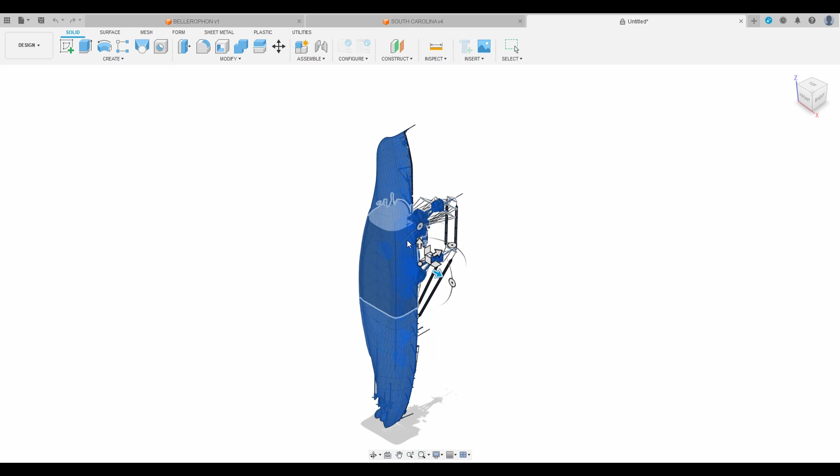There we go, and we'll set it to the correct orientation. Select OK. From here, what I'll usually do is I will scale it by going to Inspect.

I'll select a point, the furthest point on the bow to the furthest point on the stern, roughly. You'll get your measurement, you'll do your math, figure out exactly what scaling ratio you would need to get to the correct length.

Once you figure that out, I'm not going to do it here, but once you figure that out, come here to Modify, Scale, select everything, type in whatever that amount is, say it's 4.358, we'll just go with that.

That'll scale it to the correct size, and then I will double check to make sure that it is correct before I continue on. So I'll select the furthest point of the stern, furthest point on the bow. Now I get like 46.589.

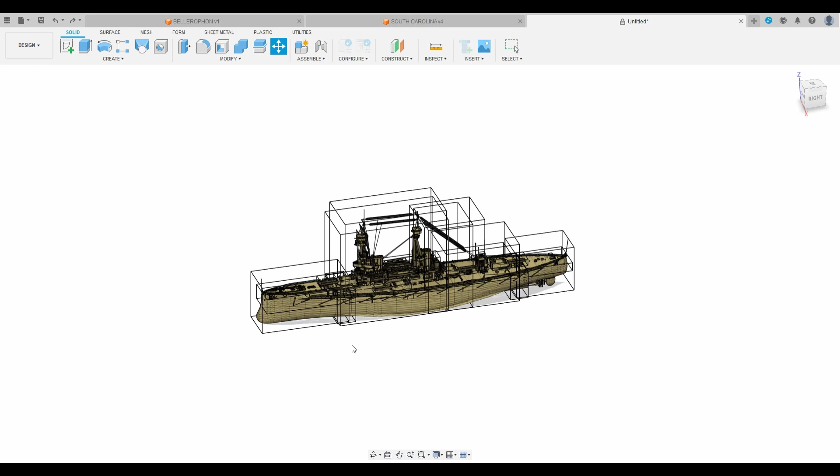So then once it's scaled, we'll want to center it up with the origin point. That way we can easily sketch all of our rib stations and everything on the center line.

Just as an aside, your drop downs are not showing. My drop downs aren't showing up here. Yeah, when you hit the modify, we don't see anything. Okay.

That's strange. Anyway, if you go to modify in the drop down, you'll see scale and everything else.

So for the movement, grab your move copy, select everything, and then let's move this out of the way so we can. Where is the origin at? Make the origin visible, that'll help.

I like to put the origin point on the very tip of the bow, not the furthest point, the actual tip. Then you'll basically just walk it in, play with your measurements until you get it all the way there.

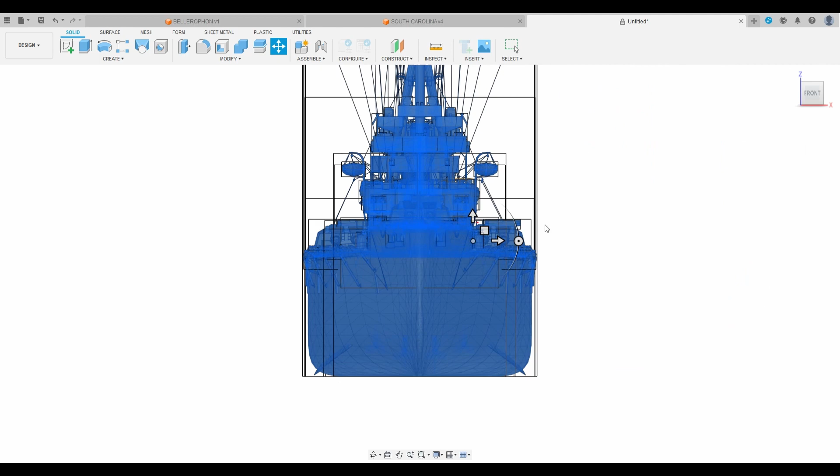So you got the tip on the point there, and then you come over to the front. Same thing over here, it's a little harder to see because it's blue. But...

Once you get that all centered and everything, what you'll get is this. So I got it perfectly on the point, the bow there, center line of the ship, and now we are ready to actually begin the designing process.

Another thing I didn't mention, there's a lot of extra details and unneeded superstructure and whatnot that even if you're designing like superstructure for 3D printing, you don't need. So you can come through and clean out a lot of this.

What I'll often do is I'll just select, hit Control, or Shift, sorry, that'll select everything between those two selected bodies. And I'll just inspect, make sure it's nothing that I need, then hit delete and get rid of it all.

Once you've done all of that, what I'll also do is I'll select all the leftover bodies, because this is a massive list and it's hard to keep everything organized if this is constantly in your drop down. So I'll select all the bodies, and I'll move them to a group, which I failed to create a group before we did this, so let me start over.

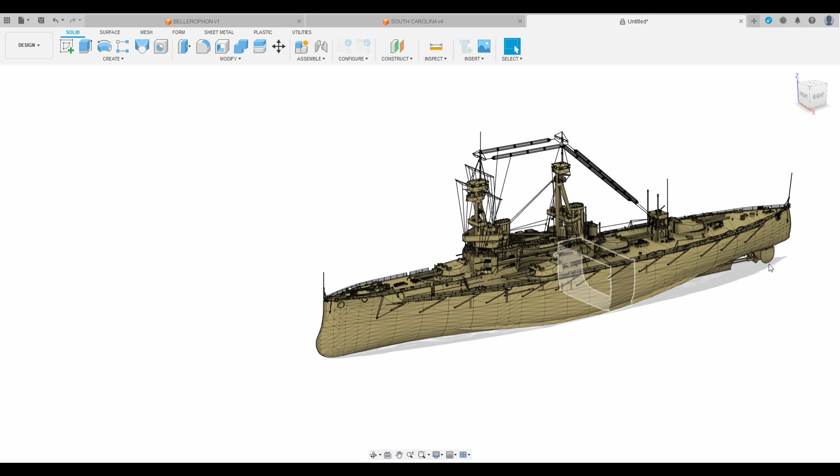And then that will move all of our mesh bodies into this group that we can easily toggle on and off for visibility. And then when we open up our bodies tab, we don't have a million bodies to scroll through to find what we're looking for. That just helps keep things organized. So we'll move over here to our properly scaled, centered one.

Now to begin this, the STL game model, I'm not really going to use any of that to convert it into an object or a solid body. I'm just using it as a 3D set of plans essentially.

So what I'm going to do is set a series of planes along the length of the hull where I want to create rib stations like you'd see in a set of plans. I'll come over here to offset plane, select that, come off of our plane here. I'm going to come out, usually on the bow, I'll start out at about 2 inches.

Let's move this back a little bit. I want to start right about where this line is. That way I can create this bow in one piece. So we'll put our first rib station here.

And then we'll just continue on adding these down the length of the hull. You'll want to have rib stations around features of the hull that you need to capture. So like this deck step here, I'm going to put a rib right where it starts. We'll place a plane there.

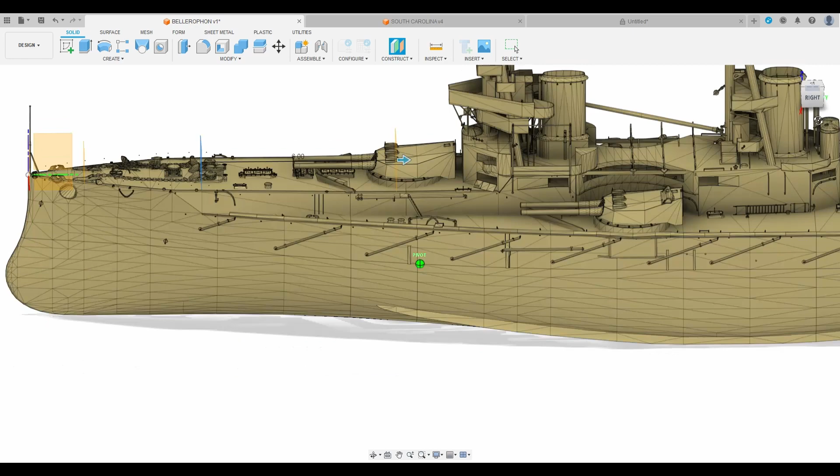From there, we'll just continue on. You don't need them super close together. I space them out anywhere from 6 to 8 inches, depending on what the shape of the hull is where I'm placing these. So I'm just trying to capture the general shape of the hull.

I'm going to place another one here at about 6.5 inches. Offset another plane. Try and make sure you get one around the widest point of the hull. So let's go about 8 inches here. Place another one.

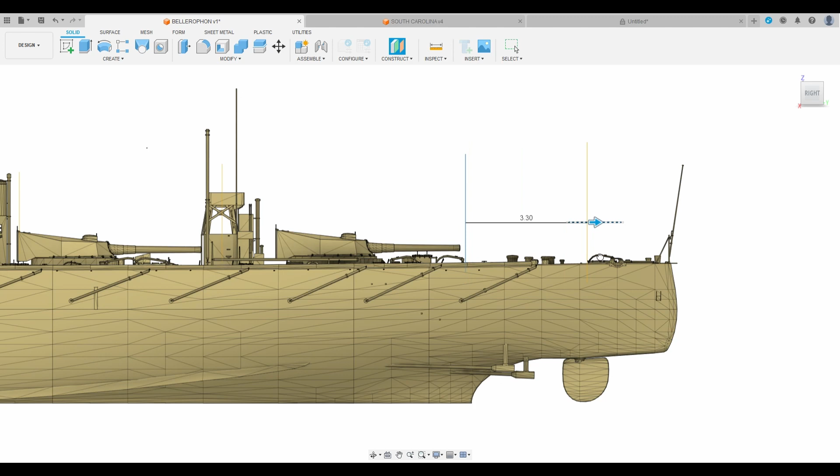And continue on. We'll go with 5.5 here. Go 5.5 again. Drag another one out. I like to place one right where the end of the keel stops and proceeds into the stern. Somewhere around that point I like to drop one, because that's where it will stop lofting and create another loft for the stern. Place one there, and then we'll put one more to give our stern some shape.

That looks good. Alright, so now if I turn off the mesh bodies, you can see we have a series of planes, and then we're going to create basically rib stations off of this body at every one of these planes.

So we're going to come over here to the mesh design area, and right here we have 'create mesh section sketch' in the create tab. You'll select that. It's going to ask you for a body that you want to create a mesh section from. So we'll click on this nose piece, then section plane, select that, and click on the plane that we placed. So this first one here, you'll see it's created basically an outline of the outside of this body. So we'll hit OK.

That's one done. We'll continue on down through, select the body, get our second station here, hit OK, all the way down through.

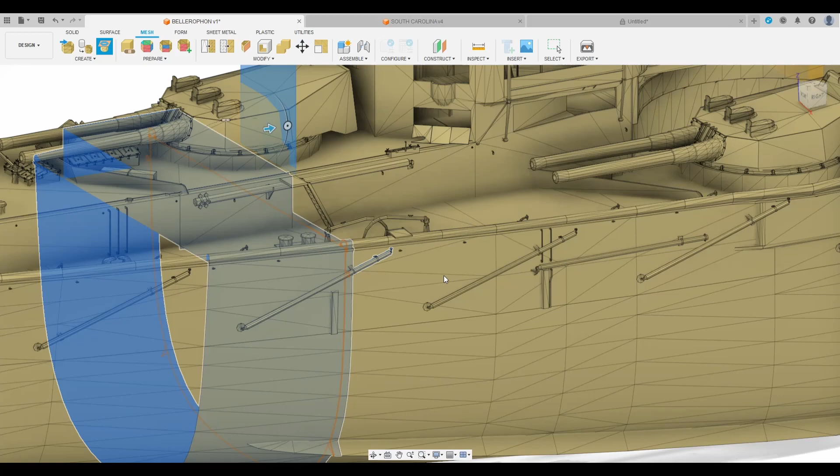And then you can see, if I turn off the body, we've created rib stations in place of the hull. So just continue on down through until we get all of these done.

Now we'll do the side profile of the boat. So since this is broken up into multiple bodies, it's kind of a pain, but just select your first body, select your center line plane, OK, and then continue on down through your bodies. This will give you your side profile.

And this making sense so far? I don't know if I have anybody watching at this point.

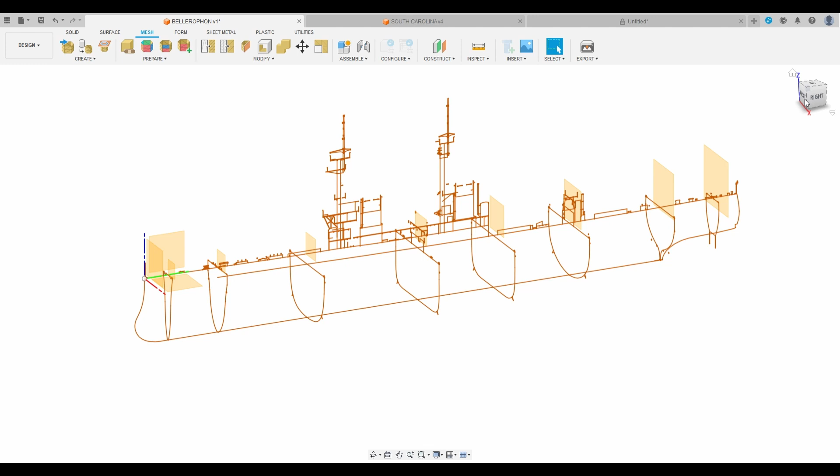Now from here we can start sketching. So before I start sketching out the rib profiles, I like to do the side profile first. And since I'm designing this for 3D printing, I like to make the nose and stern of the boat flat and thick instead of coming to a point like the actual ship.

To accomplish that, I'm going to offset the side profile sketch 0.1 inches from center line, and that'll give me a 0.2 inch flat section between the left and right halves. That'll give me a nice thick nose and stern that's not going to break when it's printed. So to accomplish that, I'm going to come over here to my centerline plane, select that, offset it by 0.1 inches, and that's now going to be my centerline sketch plane.

If that doesn't make sense, it'll make sense once we start lofting everything. So we're going to go to Create Sketch, and make sure we select that plane that we offset.

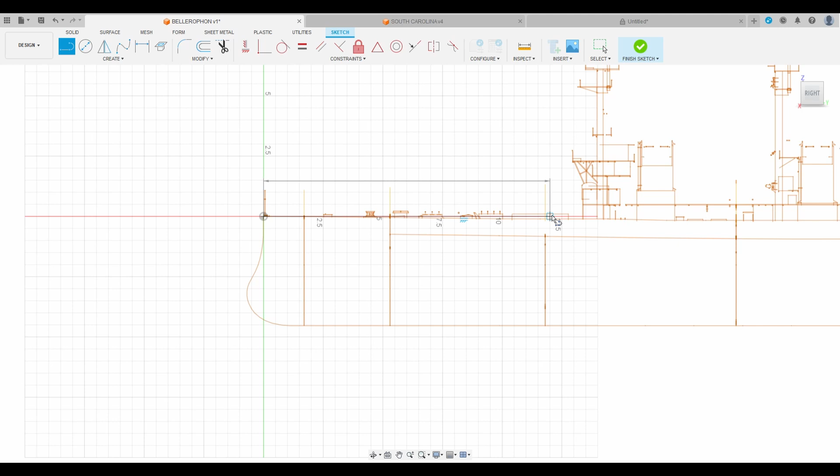We're going to start by defining the bow. This has a bit of a downward slope to it, but we're just going to make it flat. The actual flat part of the bow only comes out to about here, so we're going to drag this a little bit beyond.

And then we're going to define the bottom of the boat. Let's start scrolling here. There we go. Bring this all the way down, that's going to be the keel. We don't have to get exactly where it's going to wind up, we'll change those later.

I'm going to draw the bow. Just going to select fit point spline, so we're going to create a spline, and we're just going to follow the profile of the bow, putting several points to help define this, and then connect it there.

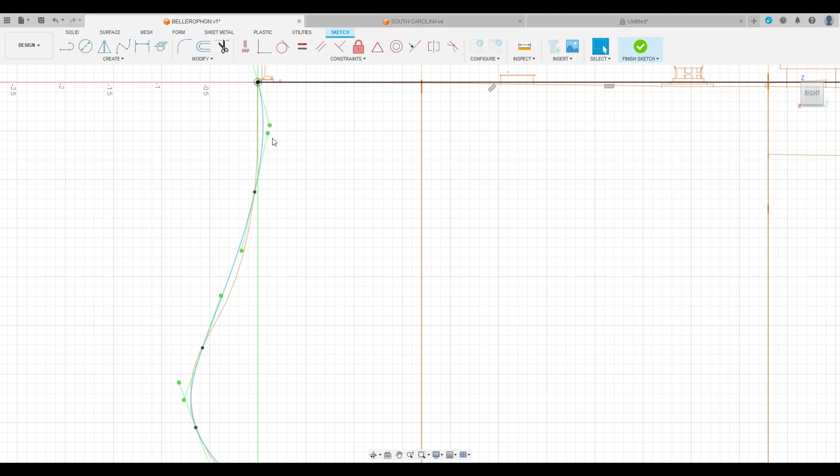Hit OK, escape to get out of the spline tool, and then we have these green arms here which allow us to modify the radius and direction of each one of these points, and we can use that to fit this line to the actual profile of the bow.

So you see this one is angled and it's kicking the line back this way, so we're going to grab this point and change that closer to up and down. This one needs to come in a little bit to get our line closer to the profile. I'm going to drag this one down a little bit, change the angle on it, change the angle on this one some.

This one we want to be in line with our keel profile, that'll make sure it's tangent. Trying to lessen the radius on this, get it closer to the actual shape. That looks pretty good, we'll go with that.

So we got that done, we're going to come over here and define our lower deck. I'm going to come off the stern. We're going to make this completely flat. You can see there's a bit of a bow to it, but we're not going to match that because it's just not productive for our purposes.

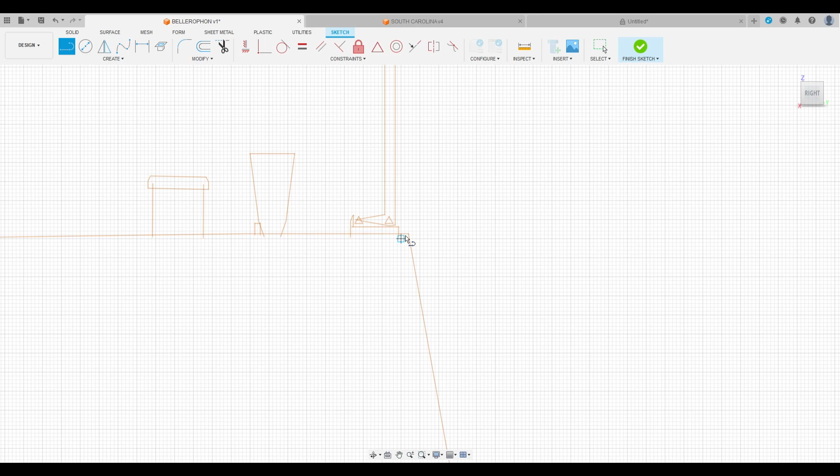So I'm going to scroll in till we get to roughly a similar point to our profile, come across, and that looks good. That will be our lower deck.

Escape. We're going to do another spline for the stern. Let's try that, see if that works. That looks pretty good. The stern, I'm going to leave this connecting piece till later, because I find whatever I put in there ends up being changed. So I'm just going to leave that open, but we have what we need to continue.

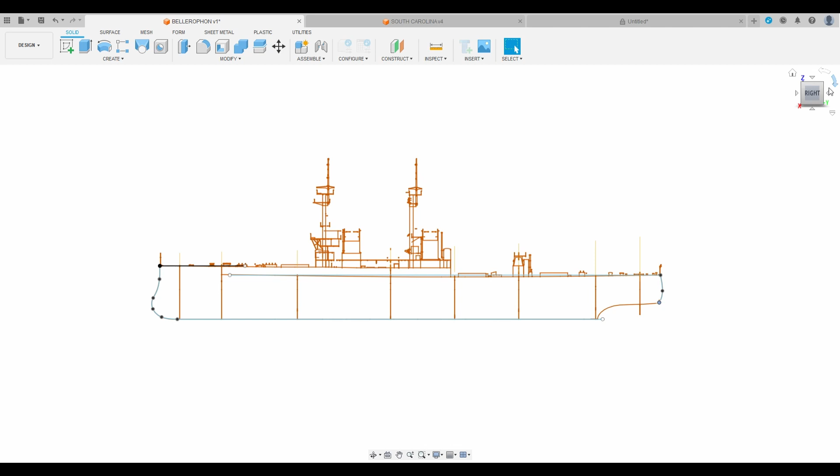So I'm going to hit Finish Sketch up here in the top corner. That's now our side profile. So now we're going to start drawing our rib stations.

I'm going to create a sketch. Oops, I must have been selecting a plane. I'm going to create a sketch. We're going to select our first rib station. And we have all these planes that we created, you can turn those off by clicking visibility on your construction, that'll get those out of your way.

But we also have a lot of these rib stations, it kind of makes it hard to see what we're looking at here. So if you open up your sketches, we can limit the visibility on all of these. I'm going to turn off everything from sketch 1 down, and the rest of these are the side profile, I'll leave those on.

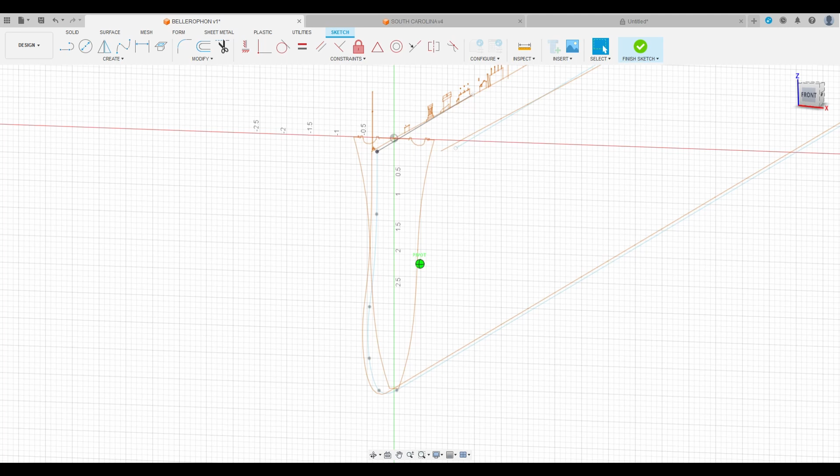So we now have created the sketch, we're looking at it straight on. Before we start drawing anything, we're going to want to intersect this sketch with our top and bottom rib, or top and bottom side profile sketch. So we're going to come up here to create.

I have mine, we want the intersect tool. I think if you go to create, open the drop down to project/include, you'll see intersect. If you click on the three dot drop down, you can pin it to your toolbar, it'll just be up here for simple and quick application. So you want the intersect tool, and you're just going to click on your top profile and your bottom profile, and this is going to create a purple dot where this sketch plane intersects this other sketch.

So our first rib sketch is intersecting the side profile sketch. This makes everything contingent and in line.

Alright, so we're going to go back to looking at it from the front. We're going to create a line, and we're going to come out about 5 inches or so. And these are just guidelines, they don't really serve an actual drawing purpose.

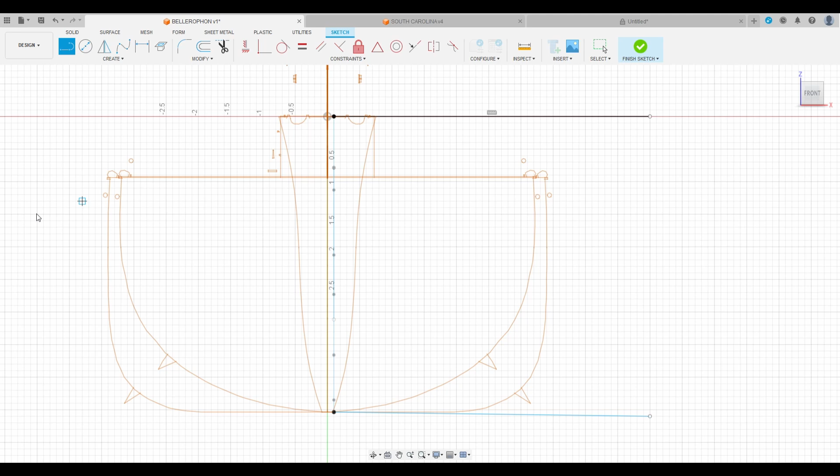I'm quick turning on our side profiles to make sure there's no features in the hull that I need to define, like armor belts or anything like that. Because if there were, I would put a line where they are to help me make sure that I define those points. I don't see any.

So what I like to do is I like to put a line roughly around the turn of the bilge, about there. And then one more kind of in the middle. We'll do this.

And then this line for the lower deck, I want to also have a line concurrent with that. That'll help me tie everything together later on. So to do that, I want to make sure that I have a line in line with our stern lower deck. To find out where that's going to be, I'm going to hit P for project, and it's going to project this line onto our sketch. It's going to create a little purple dot right there.

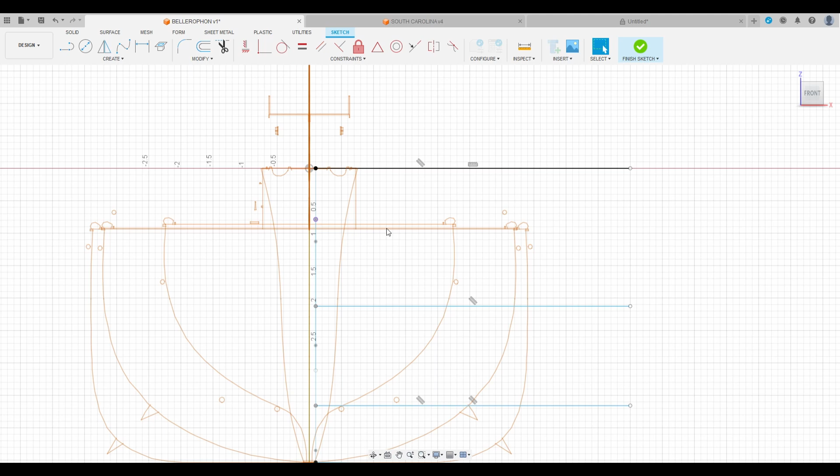That lets me know that's where my stern lower deck is. So I'm going to create a line, bring that out, and there we go.

So these are our guidelines. These will be on every sketch that we do from now on. So now that we have these, we're going to go to spline, grab another spline, and we're going to sketch out this rib. We're going to start there.

On this next line, we're going to create a point where they intersect, where the sketch profile and that line intersect. Go down through and just keep adding those on. And then I'm just going to end it right here at the corner.

I'm not going to try and match where it actually goes to, because our keel area is going to be at least 0.1 inches from center line, so I'm not going to try and make this perfectly accurate.

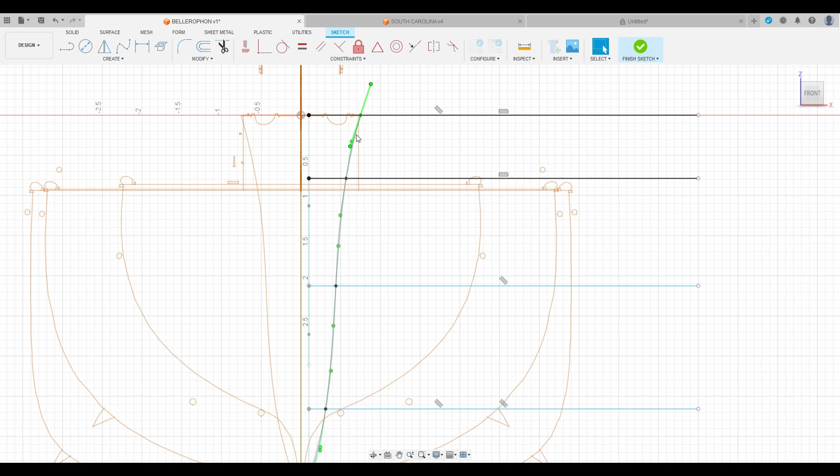So now we want to make sure that our line matches the sketch profile. We might have to adjust the green lines to change the direction of our spline in a couple spots.

This isn't too bad. This one could probably be... which one is it? This one. This middle one I want to tweak out just a little bit. There we go. Alright, I think that's good.

That's our first sketch profile. I finish sketch. Now you can see that it perfectly intersects our keel and intersects with our deck lines.

So with that being done, we're going to turn off our first sketch profile, turn on the next one, and these ones I turned on earlier. We'll turn on our planes again. We're going to now sketch out this plane. Must have been selecting a plane earlier. Okay, select that plane. We'll turn off all the other ones, get them out of our way.

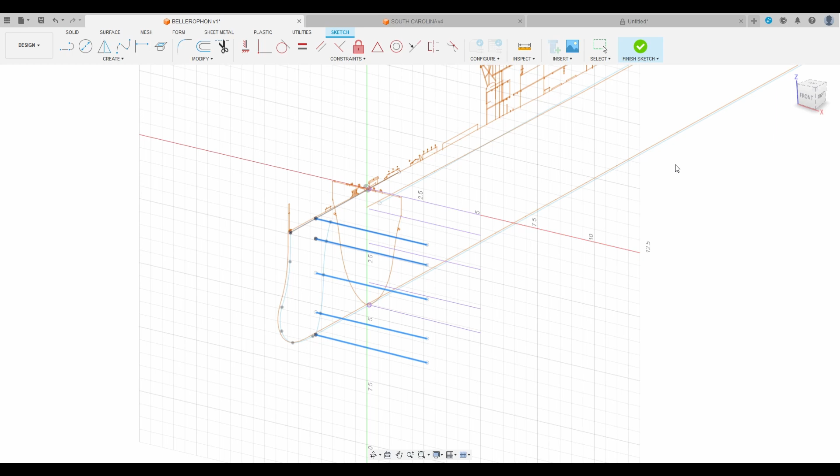Go to our side profile. Now you can see this is where that deck cutout starts on the actual boat. If I turn this back on, you can see where our step deck starts. I chose a point at the very bottom of this, so I get as much of the hull profile as I could.

What I'm going to do is I'm going to model this as if the deck step wasn't there, and then I'm going to cut it out later. So I'm going to go to spline point again. I'm going to just choose a random point up here. I'll change it later. But on this line, I'm going to keep going in line with our sketch profile.

Till we get to the bottom. Also select the corner. Hit escape to get out of our tool there. And then we're just going to make sure that we match our profile.

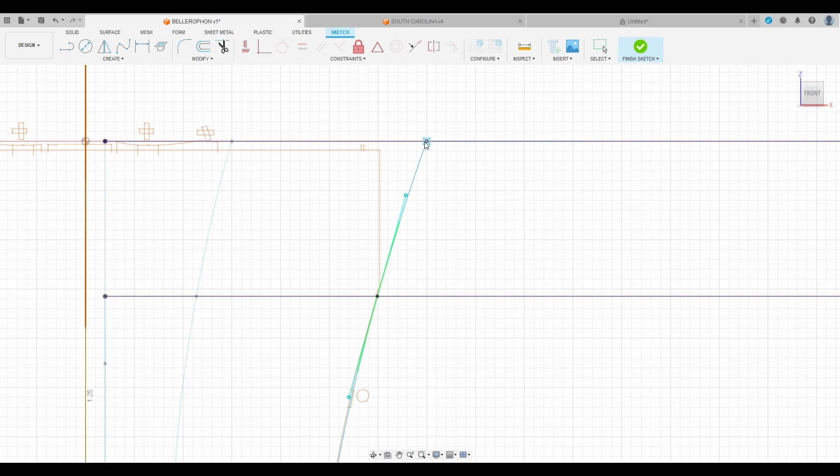And then for this point, I just adjust it to approximate exactly close to what the hull would be if that cutout wasn't there. It doesn't have to be perfect. That looks pretty good. I'm going to finish our sketch.

And now we're just going to continue down the hull with all these sketches. Why does that keep happening? Create sketch, next plane, turn off all these other planes. I'm going to project our lines, hit P for project.

Grab all those lines. We don't need this top one anymore since we're beyond the upper deck, so we'll just need these four. Go to our side profile, select spline, and follow the sketch profile to the same point.

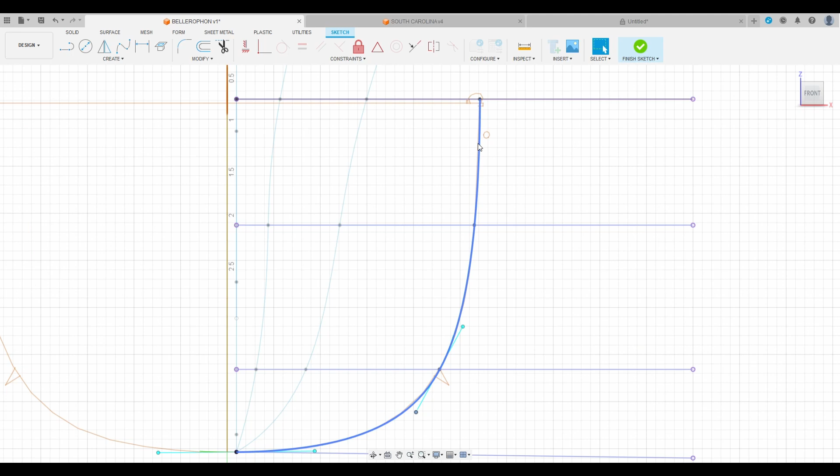Escape to get out of spline. We'll adjust this spline to fit a little better. That looks pretty good. Finish sketch.

Moving on. Turn off that sketch, go to the next one, turn on our plane. Select sketch, plane, turn off all the other planes. Project these lines.

There gets to be a lot of repetition in this process. Go back to front, spline, approximate. When we get to the point in the hull where it starts to get flat on the bottom, I'll just pick a point where it's close to flat, and place a point there instead of trying to come back to center line. This keeps the bottom flatter and more accurate.

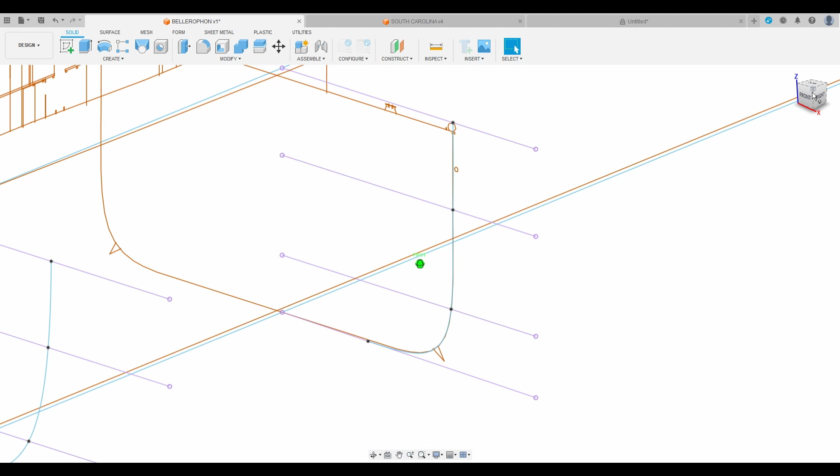Continuing on, go to the next plane. Project these lines. Go back to front profile and continue on following our sketch profiles.

I don't know if anybody's got their mics on, but is this making sense?

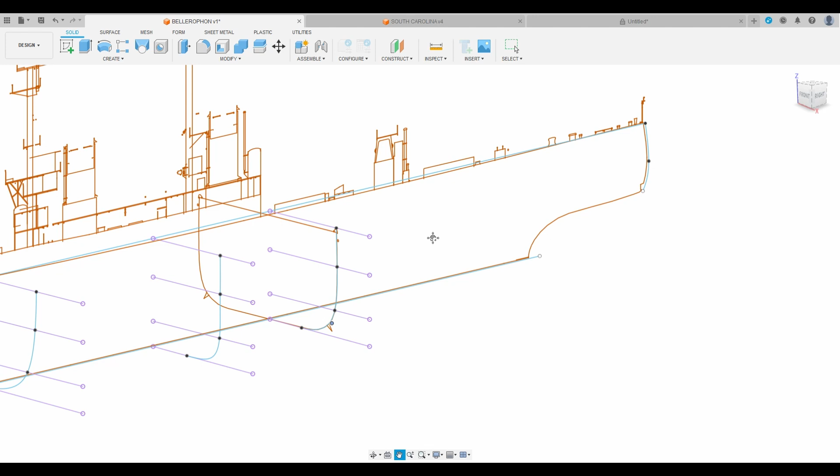I'll turn this plane on. There we go.

Once we get all of these profiles done, that's when the magic starts happening, so just bear with me here for a bit. I chose this boat because it's a pretty simple hull shape and it shouldn't take too long to get done, but it's still going to take a little bit of time here.

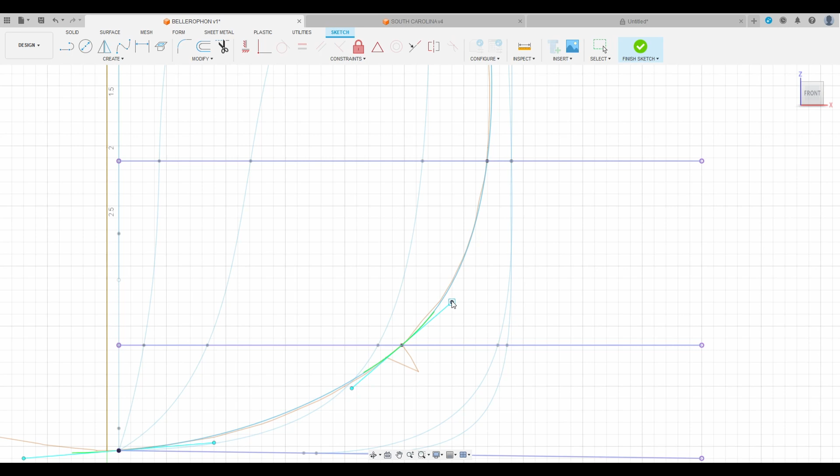There we go. Looks like we got one or two more to go. A lot of what I'm doing will make more sense once we start getting into creating rails and actually lofting the boat. So if it doesn't make sense, hopefully it makes sense here in a bit.

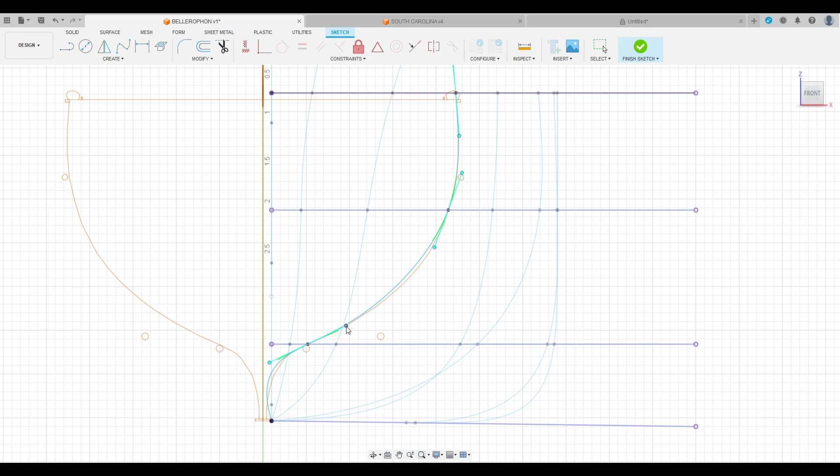Alright, that looks a little wonky. Try and get this closer to what it's supposed to be. These stern profiles are often a little harder to get in line.

Okay, I think that looks pretty good. We'll finish that. One more.

I don't know why that keeps happening. Alright, project that one, that one. I don't think I'll need it, but I'll project that one too.

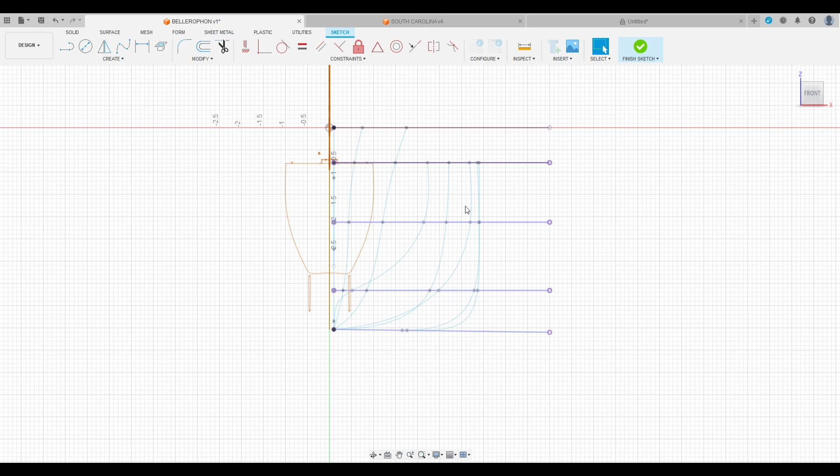The stern profile's often tricky. The bottom finish point, a lot of times I'll change depending on how the lofting's going, so it's kind of one of those - I'm just going to approximate it for right now. I'm not going to try and match this cut in the stern; we'll add that later. So I'm just going to come down, follow the profile, and come to the center line.

A lot of times what I'll do is draw a line from here to here, move this point to that line, and then loft it and cut out the actual profile of the stern. But we'll get to that here in a second.

So what I'm going to do is click on this side profile again, right click, edit sketch, and that'll open it back up. I want to end this keel profile at this rib, so I need to project this rib onto the sketch, which will let me select it and draw a line off of it.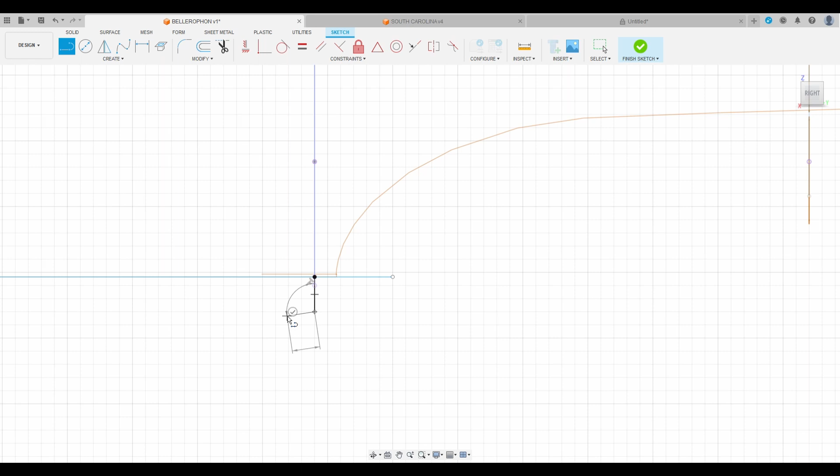The purpose of that is just to trim this tail section off. If I didn't project it and draw a line, it would delete the whole thing because it doesn't know that rib exists. So I need to create a point that it will trim to, then get rid of that. So I'm going to draw that now, and that's how we're going to loft the stern.

I could try doing it semi-shaped. We'll give that a shot. Sometimes it works, sometimes it doesn't. We're going to try and match that profile.

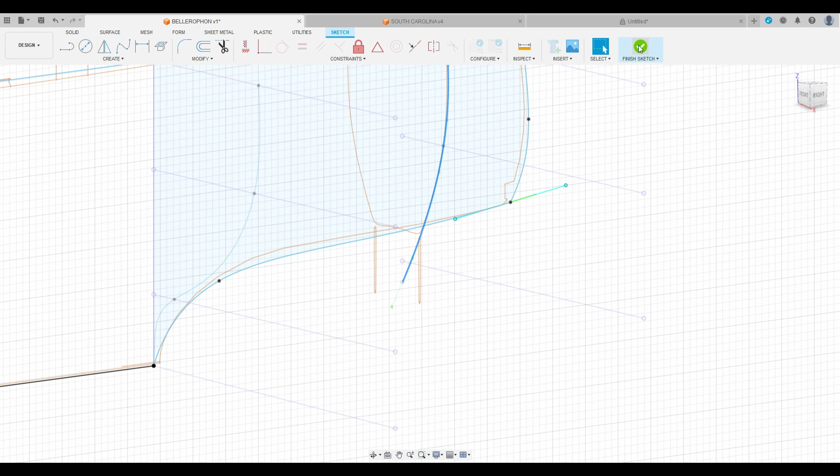So that means I need to change that. Alright, we'll finish our side profile sketch. We will open or edit the sketch again. We'll want to intersect this new line, this new keel that we drew, so we know where our rib profile has to end.

I'm just going to redraw this. I'm going to delete it and redraw it, see if we can't make this right. This may work, this may not. We'll find out. Change that to flat. I'm going to decrease the radius on this by a lot.

That way we get the actual shape that we need. And then change these to be closer. Close enough, I guess. We'll try it. It may work, it may not.

Alright, so the stern's now done. We'll come over to the bow and do basically the same thing. We're going to click on sketch, right click, edit sketch, come to our side profile. I'm going to trim this down. See, if I was to try and trim this without drawing that line, it'll just cut the whole thing away, and I don't want that.

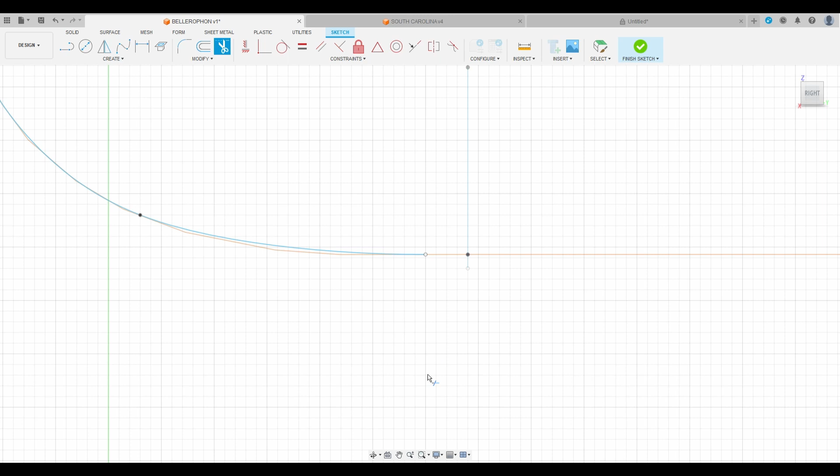So I'm going to project this rib onto the sketch, the line, drop it down, trim away that excess, and then the bow profile I'm just going to drag to the end of that line. Now we're just a little bit off, but I'm not going to really worry about it. It's close enough.

So now we have our bow profile that ends at our first rib. We have our stern profile that ends at our last full rib. And then that's pretty much all that we need for that. Oh shoot, I forgot, these points that we created in every rib, we're going to also connect those to the bow.

So we're going to go back, edit our side profile. All these lines, all these points that we, I guess they didn't project. All these points, we're going to project them onto the sketch now.

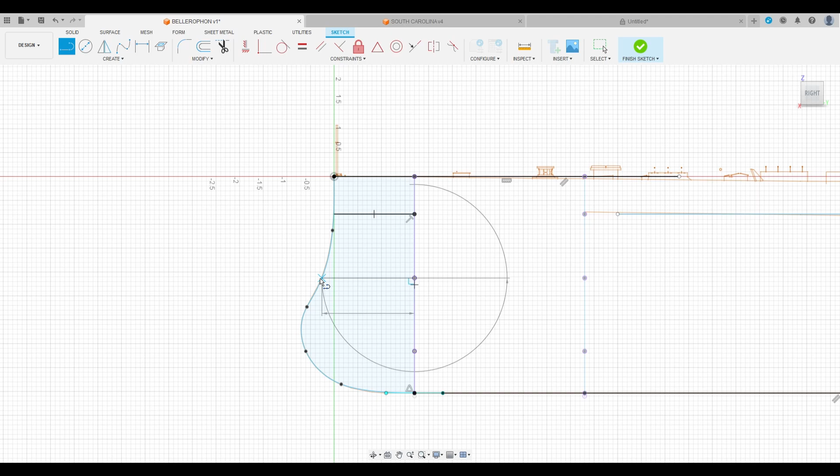And now we're just going to draw a line from those points at a right angle to the bow, wherever it intersects. That doesn't seem right. Alright, well, close enough. And then we're going to do the same in the stern. Let's see, just going to do this one. Close enough, I guess. Alright.

Finish sketch. Now we're going to create our rails. These will help define the shape of the hull and keep everything in line as we loft it. It'll also give us our correct bow and top profiles.

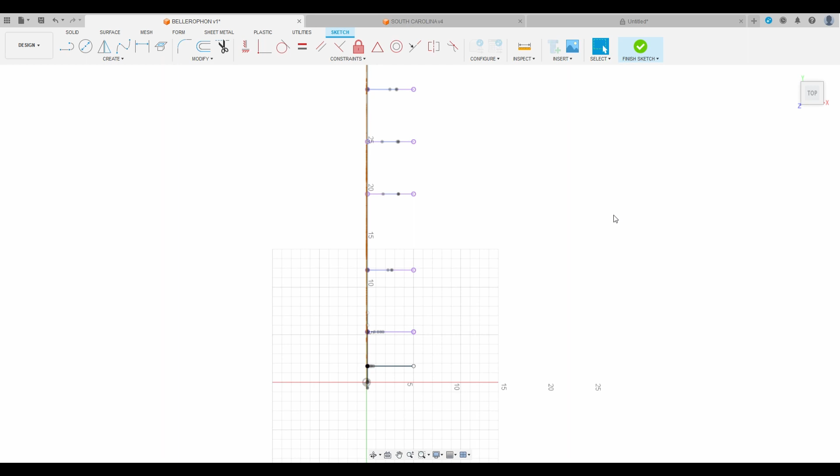Alright, so we're going to create another sketch. We're just going to go to our top plane, looking from above. Over here in your sketch palette, this may be closed, you might have to open it up. There's 3D sketch, we're going to want to turn that on now. That's the secret sauce. So with that turned on, we can now draw sketches in 3D.

So I can go from all different points in this model. It doesn't matter if it's on a plane or what plane it's on, it goes between planes. So we're going to use that to create our rails for lofting.

So we're going to start here at our bow, very tip of our bow in the side profile. We're going to click that point, go to the top of our first rib and our second rib. And then that's all the points in that plane, so we're going to just stop there. Hit escape, that'll get us out of our spline tool.

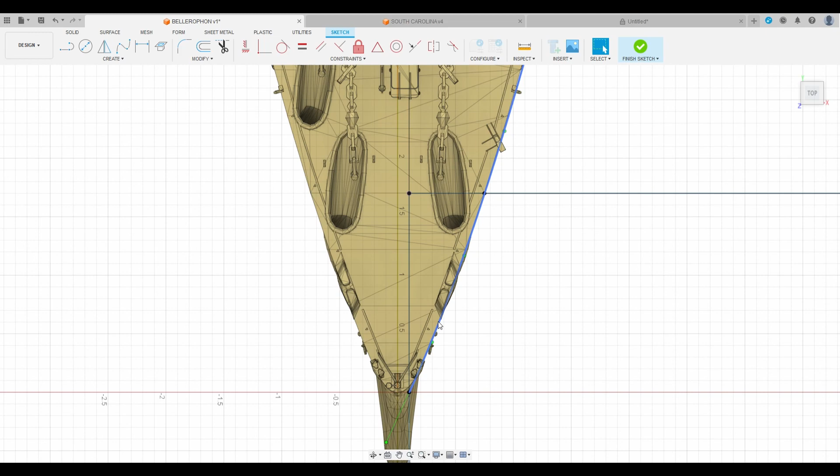Come up to our top profile. We're going to turn on our mesh bodies and make sure that our line matches the curvature of the hull, which it does, so that's good. Got almost a perfect match.

So from there, we're going to do the next one down. Get our spline point, we're going to come to where that line intersected with the bow. Click there, go to our first point, next point, and then it'll be the tops of all of these ribs. We're going to just select those points, going down the length of the hull, all the way to the stern, and then finish.

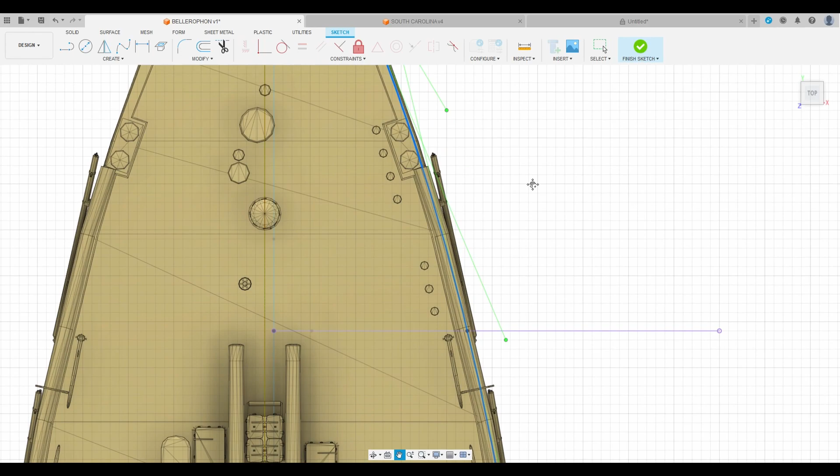So now we have a perfect line defining all of these ribs, and it'll give us a nice, clean, continuous deck profile. I want to make sure it matches the hull. Turn that back on, click on it to make it blue. Matches our stern profile pretty well. I like it, alright, that'll work.

Turn off our mesh bodies. And then we'll continue to do our rails for the rest of these points, down the length of the hull.

And then I'm going to just end it here. I don't like to continue this one into the keel. I've had weird issues with that in the past, so I'll just end it at the very last rib that it comes to.

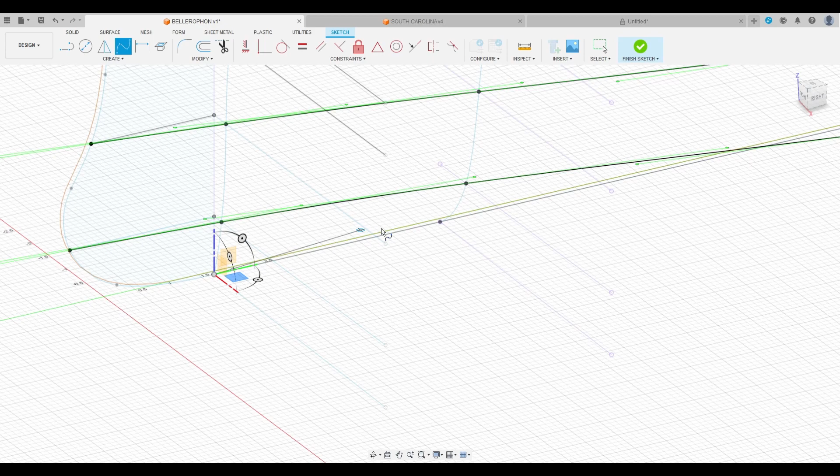And then I like to create one for the bottom of these ribs, so I'll go to the bottom point. The only reason for this is because of... you know what, I could probably get around this. Hang on.

I'm going to open up these sketches and draw a line to the center profile. This will be easier. So if I was to go back, where I put that last spline point to put it on the bottom of the hull, I would draw a line back to the center line. That's what I should have done. I'm going to do that on this one as well.

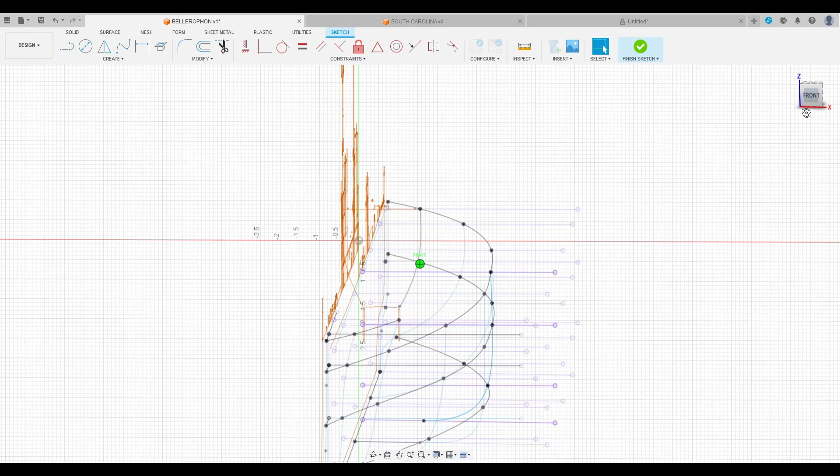This just puts the end of every sketch on the center line. Alright, that should work. We got a lot of these projected lines. If you wanted to delete them out to make it cleaner, you can. I usually don't, because it doesn't matter—they're only there for a brief minute, and then I'm beyond needing sketches.

I'm going to delete them out just to make this a little more clear, so we can see things better. Give me a second. Alright, so they're all out of here.

So at this point, we're ready to loft. So what we're going to start with is the bow. We're going to go over here to our surface tab, select loft, and now select our profiles to loft. We'll start with our first rib profile, and we're going to come over here and select our bow profile.

Oops. Since they're touching, Fusion thinks they're all one. So I'm going to deselect the bow profile, hit the plus sign, and that's just telling it the next one I click on is a separate profile. And now we get a body drawn.

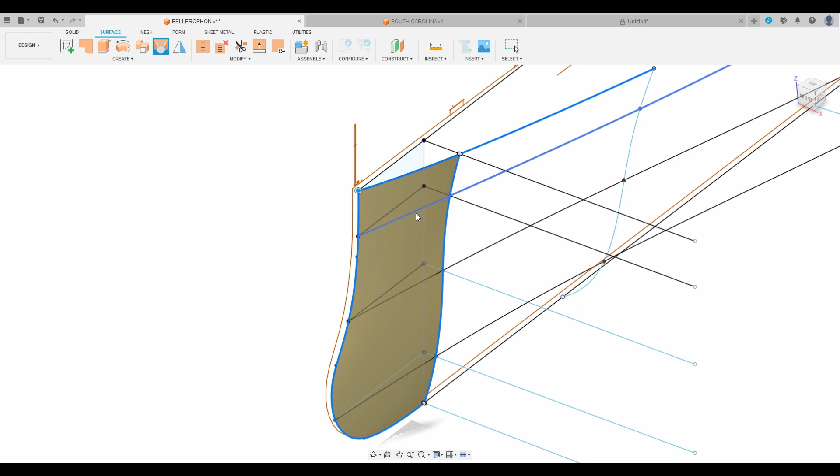Come down here to our rails tool, select the pointer, and then we'll select each one of these rails that we created earlier. Once we have all those, we can go ahead and hit OK. It gives us the first part of our bow.

And now Fusion will close or make invisible any sketch profile that it uses for the first time. So all the sketches, that first one, all of the rails—it just turns the visibility off on those. So I'm going to go back and turn on our side profile, first rib, and then our rails.

So from here, we're going to go to loft again, go from our first rib to our second rib. Going to select our rails again to keep our hull shape continuous, and select our keel to keep that straight. Hit OK.

And we're good there. Now to go from this point where we have our upper deck to our lower deck, if I was just to start our loft, select that profile with this profile, I'm going to get this—it's going to bring it down to our lower point here. Don't want that, I want it to be straight. So I'm going to go ahead and cancel.

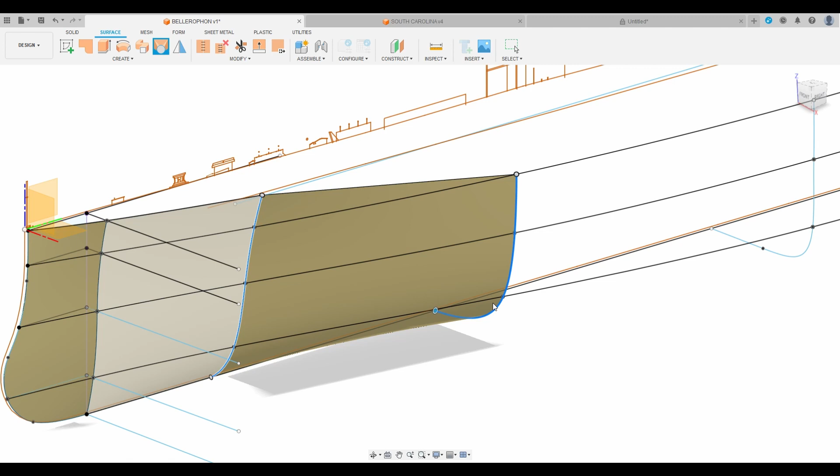I'm going to come into this rib sketch, edit it. Oh, I got to turn it on—turn that sketch back on. Select, right click, edit sketch. And then at this point, we're just going to draw out a line. Doesn't really matter where it goes. We're going to go to modify and break.

With that, it'll create a break in the continuous spline point here at that line, so then we have an upper and lower part of the sketch. Go to our trim tool, delete out that line because we don't need it. Finish sketch. And now when I go to loft again, it doesn't select that part.

So now we go from our lower piece to our next rib profile, and the next, and the next. We're going to do most of the hull right here, select all the way back here to the stern. We're going to select our rails, and this keeps all of our lofts... oh, that's not good.

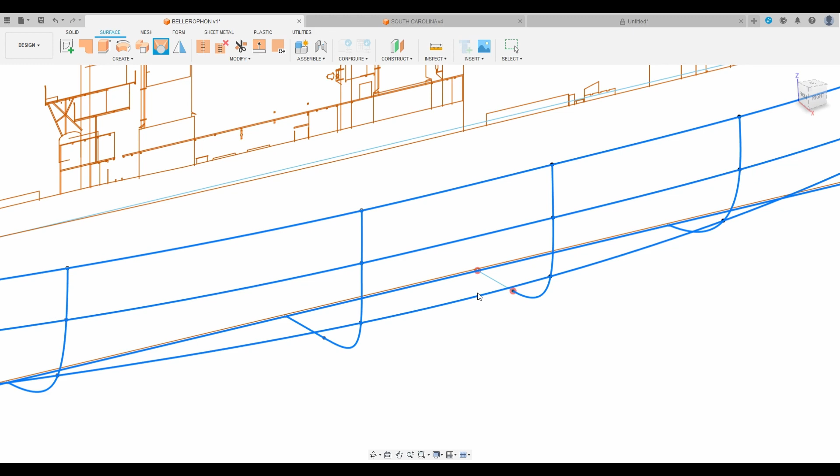Okay, I know what I did wrong. Those extra lines that I drew, I did not select those, so it has the end of the sketch here. It's not connecting to my rail back here. So I need to go to this profile 3. Select that, select there, and now it's connected and it's happy. And this is profile 4. Select that, and there we go. So now our rail is touching all of the points.

Okay, I think that is good. I'm going to go ahead and hit OK. And if you turn off our sketches at this point, you can see the hull start to take shape. It's looking pretty good. I'll turn this back on and finish up here in the stern.

So what we're going to do, we're going to loft from here to here to here. And for our rails, we're going to have our top, middle. I'm going to try and select that. I think that'll work. No.

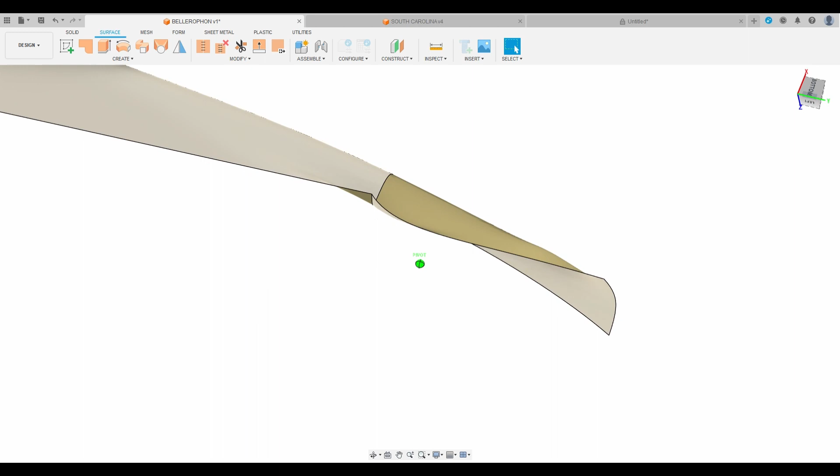That's looking weird. I'm going to go ahead and hit OK, just so we can look at this, but it's looking kind of funky. We'll turn off our sketches, and yeah, that's looking kind of weird. I don't know if you can see it. Let me turn on our zebra analysis here. Let's see where we get like a really weird bulge right here, because I tried to match the stern profile.

So we're going to go back and do what I was going to do originally and just cut that stern profile out after the fact. So what we're going to do is edit our side profile, delete out this spline. We're going to draw a straight line from the edge of here to the tip of our stern. We're going to finish our sketch, and then this profile here, we're going to edit sketch.

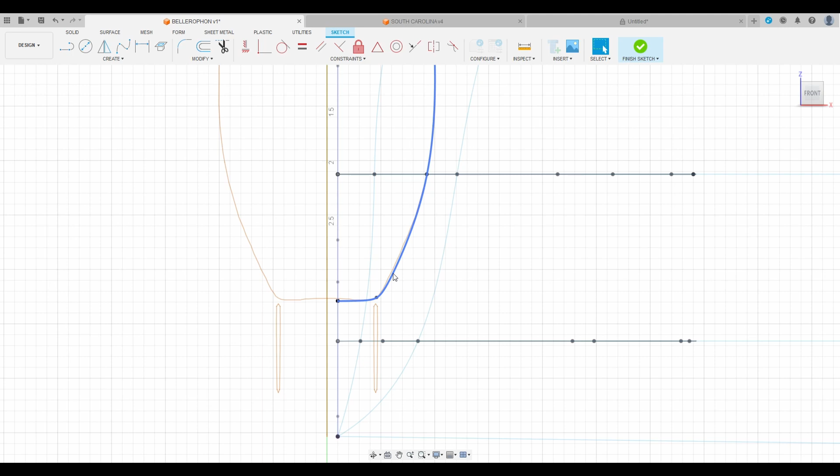We're looking at it from the back. Let's go around to the front. Let's turn off our bodies for a second while we work on this. Delete this previous spline. We're going to intersect this sketch with our new stern profile. Go to intersect. And I'm going to delete this old intersect out of here so I don't get confused.

Go back to front. Deleted those projected lines. I'm going to add those back in real quick. Looking at it from the front. I'm going to turn off 3D sketch for a second because I don't need it.

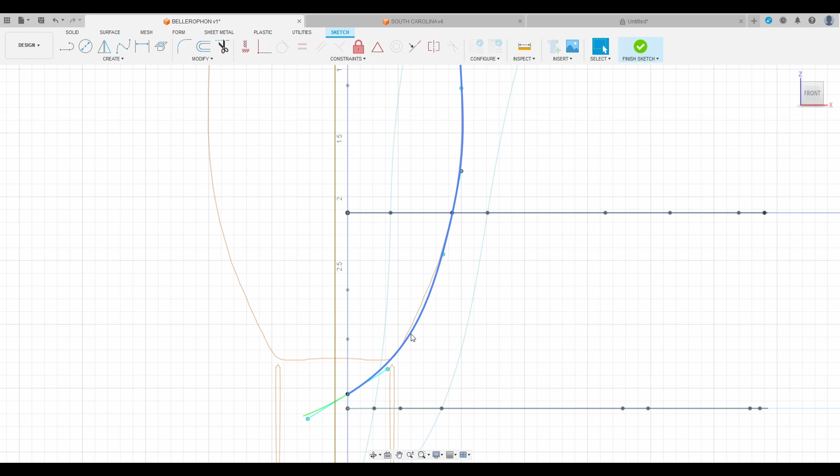And we'll come down to here, and then we'll just adjust this to meet roughly the correct shape of the stern. Not perfect, but it'll be alright. I think this will work. Alright, we'll finish our sketch.

Turn our bodies back on. We're going to loft from here to here. Oh, hang on, let me start this over. I had one of those spline control points selected when I started the loft, and it was trying to go between that and then our profiles. Alright, let's try that. Select our rails.

That's a problem. Okay, so when I deleted that old profile out, I didn't make sure that I intersected our rail, so I have to go back and make sure I do that. So doing it right the first time really helps.

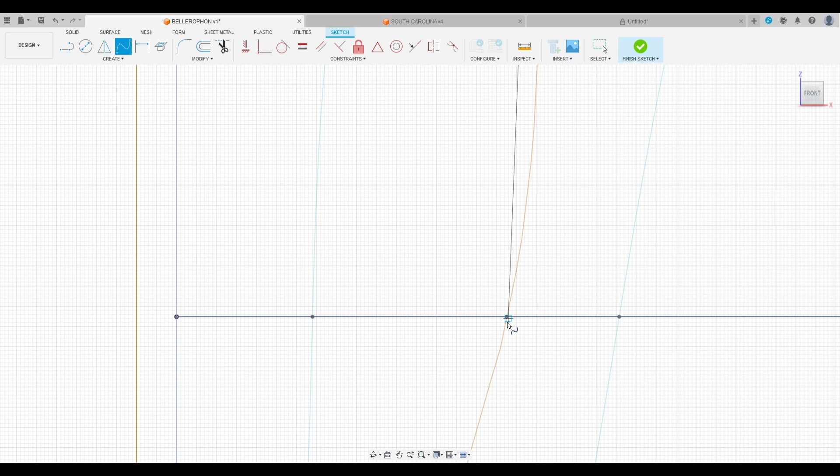Alright, so we're going to delete this spline. We're going to do an intersect with this rail. I have to make sure we start from that point. Alright, continuing on, let's do this again. Let's try to get it right this time.

Okay, that looks good. Alright, this time it's going to work. We've got that spline point selected again. X that out. Select our profiles. There we go. Our rails. I failed to do it on that one, of course. Alright, go back and do that one again.

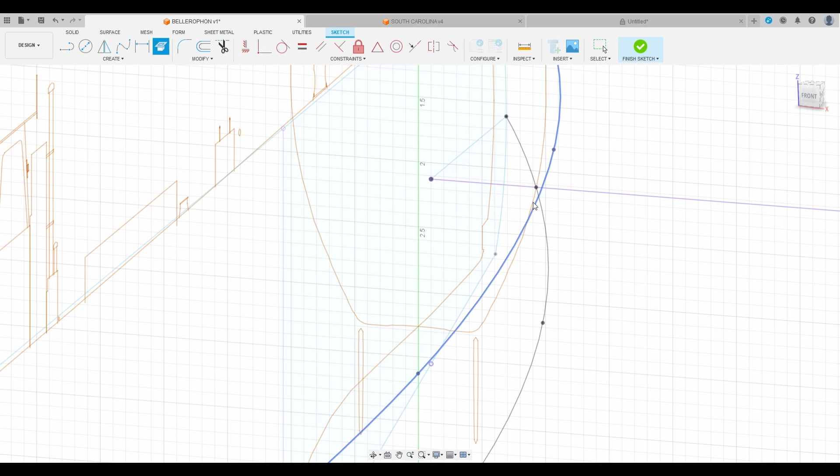Third time is the charm. Alright, delete that out. Intersect this profile. Go from here to here, to here. Okay.

Now it's going to work. Good enough. Alright, turn our bodies back on. Loft, delete that point, go from this profile to this profile to that profile. Select our rails. It worked. Alright, there we go.

We'll turn our sketches off. You'll see there are different colors here. This is a surface body, so you have an inside and outside. The white is the outside, the yellow is the inside. Depending on how you have your Fusion set up, this might be like a dark gray, but you want to have on the outside this white color.

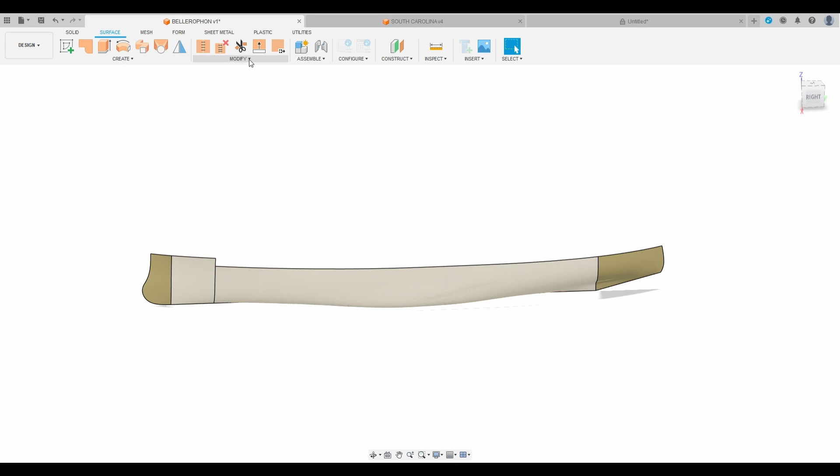So if you go up here to modify, you'll see a reverse normal tool. We'll click on reverse normal and we'll select the surfaces that have the wrong color. That'll flip them around.

Quick, get a drink here.

Alright, so this is our hull, at least half of it anyways. From here on out it's pretty easy. So what we want to do is stitch all these together so they're one surface.

So go up here to Modify, in your Surface tab, select Stitch, and then just select each one of these individual surfaces and hit OK. Now if you watched up here in our Bodies tab, that went from 4 different bodies to 1. So now these are all together.

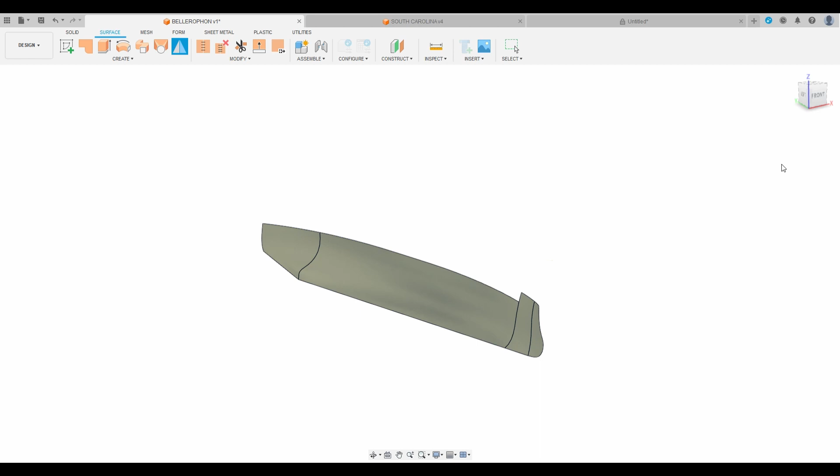We're going to go over here to Create and Mirror. Grab our mirror tool, select this now one surface, select our mirror plane to be the center line. That's going to mirror it on our center line, and new body is fine. Hit OK. And now we have our hull.

Now you can see where offsetting that side profile put me 0.2 inches apart from each other here. Now we'll just have to fill that gap up. But that gives me a nice flat, thick bow. It's not going to break once it's 3D printed.

So to do that, we're just going to go to our loft tool again, and we'll just loft one side to the other. It doesn't matter if the normals are reversed, we'll just go back and change that afterwards. We'll go through and just continue this on.

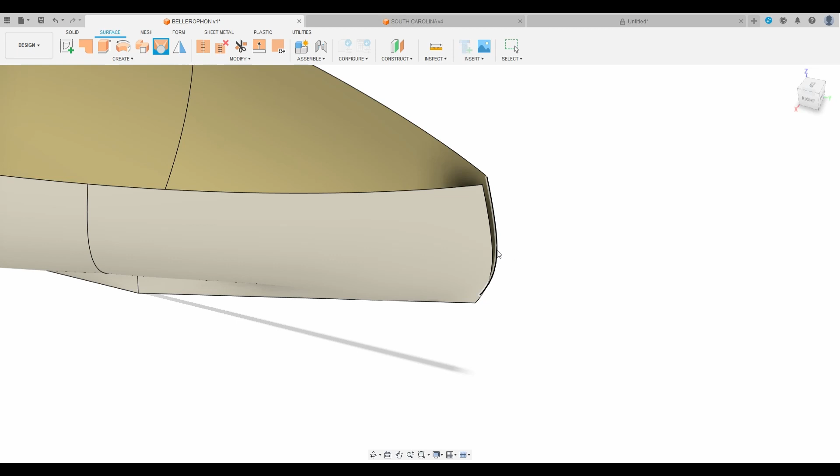Select here and here, do the stern, stern here as well. And then we'll do the decks. Just select all the edges, and it'll do all the work for me. And close up this part here as well.

Alright, so now we're just going to go ahead and flip all of these surfaces that are backwards. Go back to your Reverse Normal tool, select everything that's yellow. Flip this. Oops, there we go. Flip it over. Grab all these ones on the bottom. And hit OK.

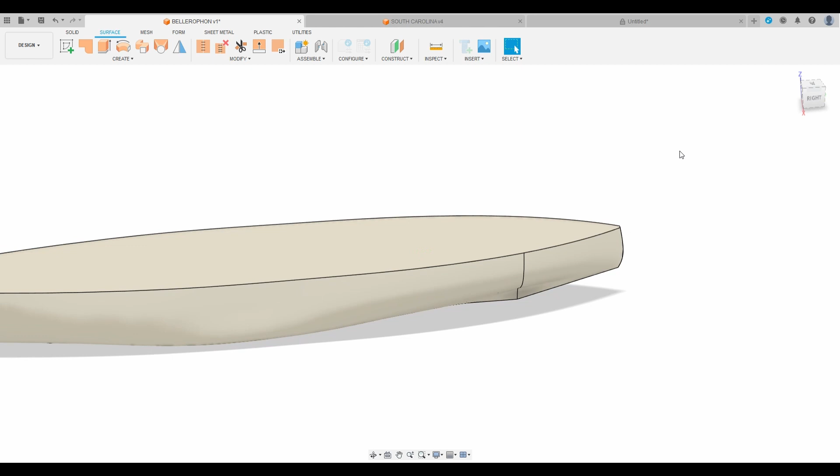So now we should have all white surfaces, meaning that we have the outside facing out. So this is just a series of surfaces here. It's not a solid body yet.

So what we're going to do now is create a solid body out of these surfaces by going to Stitch again and just select every single surface. Make sure you get every one. Alright, all green, we haven't missed anything. We'll hit OK, and watch here when we hit OK. Body 15. This is now a solid body.

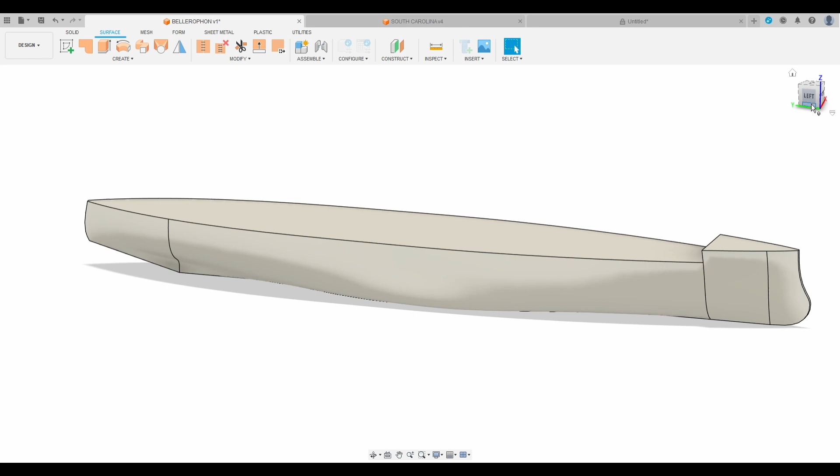This is what you would use to create a 3D printable design for RC Warship Combat. But before we finish, gotta remember that we have this cutout for the deck step to complete.

So what we're gonna do, we're gonna go back to our mesh. We're gonna select Create Mesh Section Sketch. Go select this forward body. For the plane, we're going to select our top-down plane, and we're just going to grab this arrow here and move it down until we get into this deck step portion. That'll give me the line to go off of for doing this next step.

We'll turn off our mesh bodies there, turn our sketches back on. We're just going to turn off all the sketches that we no longer need from earlier, so everything but the very last one right here.

So now we're going to go back to solid, create sketch, and we're going to come off this, the top of the bow. Load for a second. And then we have our line here for where that deck step happens. So I'm just going to create a line at the back here and just come straight out following that profile.

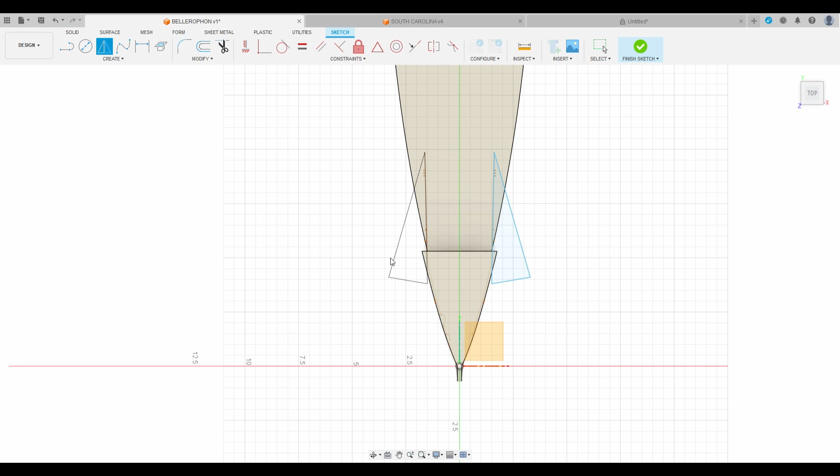And then basically what I'm going to do is just create a sketch here to cut that. I'm going to create a mirror of this to the other side. Turn on the origin here. Mirror it over on our center line. Finish sketch, go to extrude.

Grab these two sketches, drag them down. I'm going to click the lower deck and it'll automatically drag that sketch to that deck. Hit OK. And now we have our cutouts.

Which it looks like aren't exactly perfect going off of the actual model. So I may have messed up a little bit in the past when I designed this.

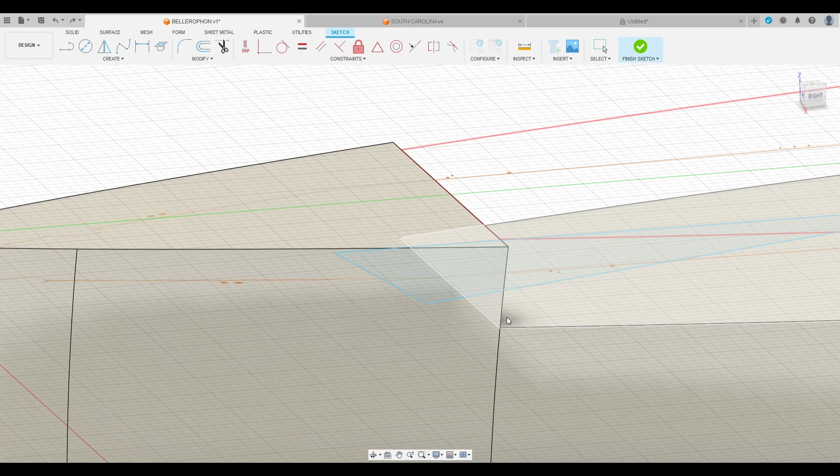So to fix that, what we're going to do to make this right, we'll go back to editing these sketches. What I'm going to do is I'm going to project this point right here, where the edge of this deck is. I'm going to project this point. I'm going to draw this line on that point.

That'll make sure my step happens at the intersection of this lower deck and the upper deck. And draw a line straight out. Same the other way, I don't really need to go as far. It's kind of messy, but I'm just creating a sketch to cut with.

Got that, we'll mirror it over. Select all of our lines that we wish to mirror. Select our center line by turning on the origin. There we go, finish sketch.

Now we'll extrude these again. Drag down a little bit. Grab our bottom deck. Boom. And there you have it.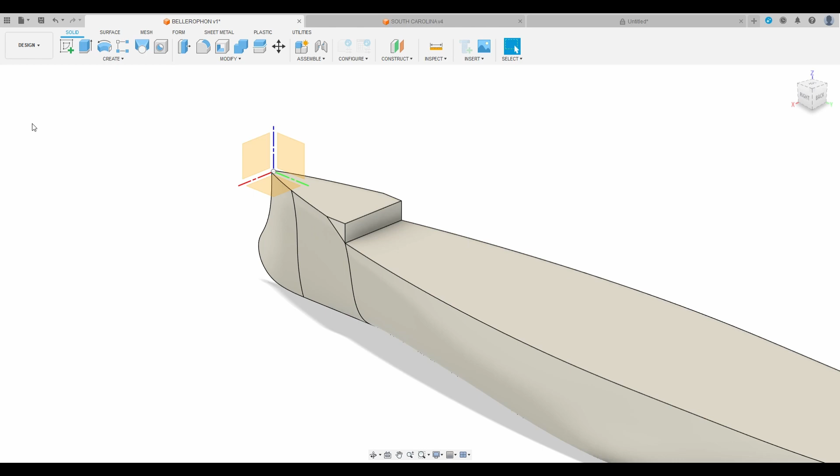Now if we wanted to create this part of the deck that comes out and extrudes from that point, we just grab our extrude, grab that profile, and drag it out as far as we need to. Let's see if, honestly, it goes all the way back to the stern here.

I can chamfer these corners to get them pretty close to the model. Need a little half circle cut out there for the turrets. But there you go. That is pretty much ready to start cutting up and using for your 3D design.

So we went from our mesh game model to a 3D print ready solid body model.

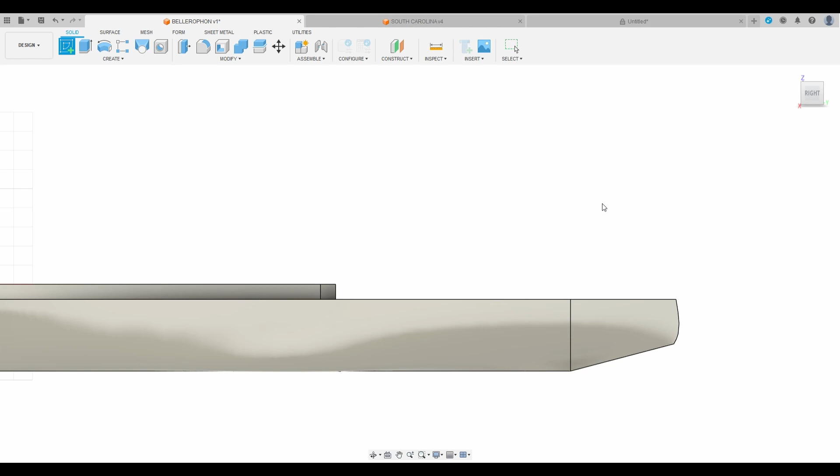I've got to cut out the stern. We're not done yet. We could create a sketch on our side profile. We're just going to turn on our mesh body here real quick, and let me project this point so I know where it's at.

Project that point. Now we're just going to kind of follow - actually, let me switch to a spline. I should also project this point. Bear with me here. Hang on, looks like my earlier line stayed there. Alright, project those two points.

Grab your spline tool, and we're just going to define our stern as best we can here. Going to create a straight line, curves down, and then we're just going to connect those two points so we can cut that out now. Finish sketch, turn to the side, extrude.

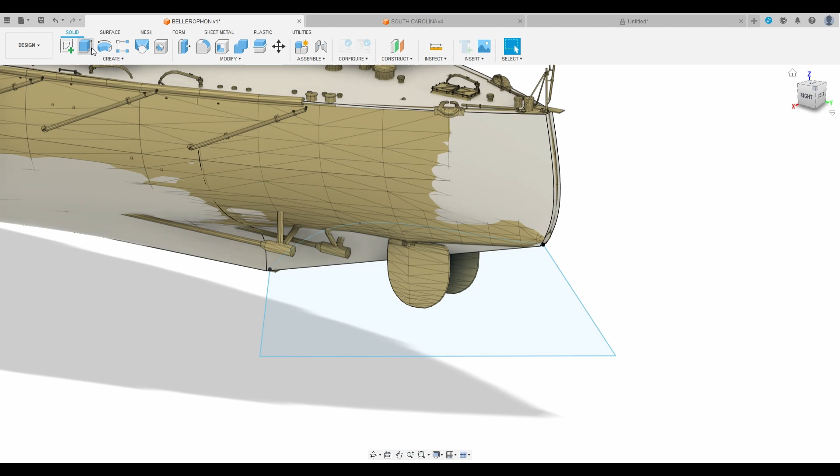It's already selected that, just drag it out one direction. Go to our direction, put it as symmetric so it'll extrude the same amount. Now the other side, make sure we cut away everything that's there. Hit OK, turn off our mesh body, and bada bing, bada boom.

There you go, now your stern profile is correct. And now it's ready. There you have it. Any questions?

Pretty cool, man. Was that clear? Does it make sense?

Yeah, I'll probably have to watch it again two or three times to actually have it all sink in. But yeah, a lot of it's just playing around with it, seeing what works.

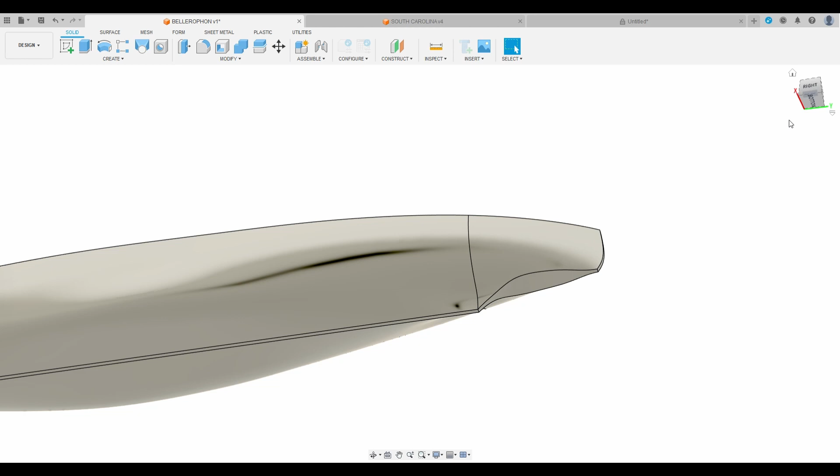The stern and bow a lot of times will give me trouble, the stern for the most part. So where I had it straight is just because trying to get the curvature of the stern correct - if I try and match that curve there, it seems like it messes up the profile every time. So I'll just make it straight and then cut it out afterwards, and it seems to be, I mean, it's not perfect, but for our purposes, it's absolutely fine. Good enough.

Adding those rails from rib to rib to rib really helps maintain the hull shape from one loft to another. Keeps everything concurrent and makes sure your profile is correct too, because sometimes the loft tool will bulge between two ribs and you don't know why. Those rails will help keep everything in line.

So, well, hopefully this is a helpful tutorial. People will be able to profit off of it.

If you were to use a set of plans, it's a little bit more involved because you've got to put your planes in the correct locations as far as your hull stations are located on your plans. They don't have quite as much creative freedom as you do with a game model, but the process is pretty much the same. You lay out your planes, create your sketches off of your hull profiles, and then there you go. From there on, it's pretty much the same process.

This will be available in June, right? This model or this boat? Kidding, that's up to Will. I don't know exactly what his schedule is going to be for releasing stuff. That's fine, I'm teasing. I just completed this last night for him. This will be coming to the website here soon.

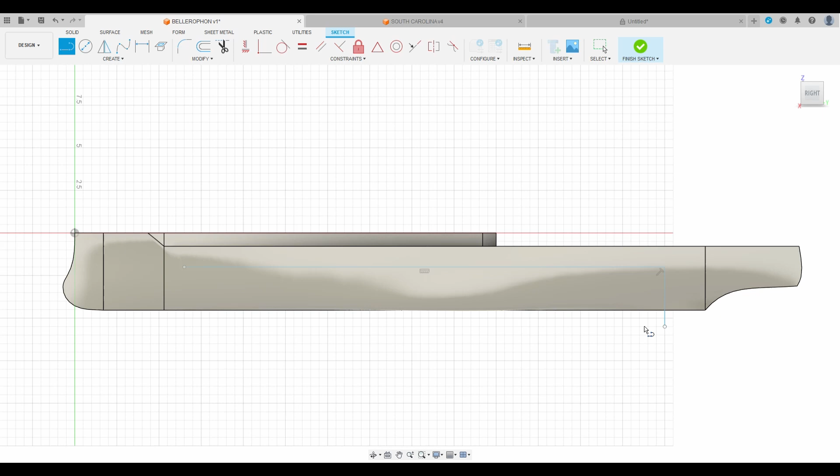What you want to do is create a sketch on your side profile, and if this boat had an armor belt, we want to match the profile of it. So let's say it starts here and runs to here. We're going to draw lines down, and if this was the actual armor belt on the model, we're going to come back maybe an inch or two, and that's the actual point we're going to drop down. So this is our actual armor belt on the real ship. This is where we're going to model too, and I'll show you why later.

So what I'm going to do is delete this actual armor belt. This is going to be our model belt. We're going to finish our sketch.

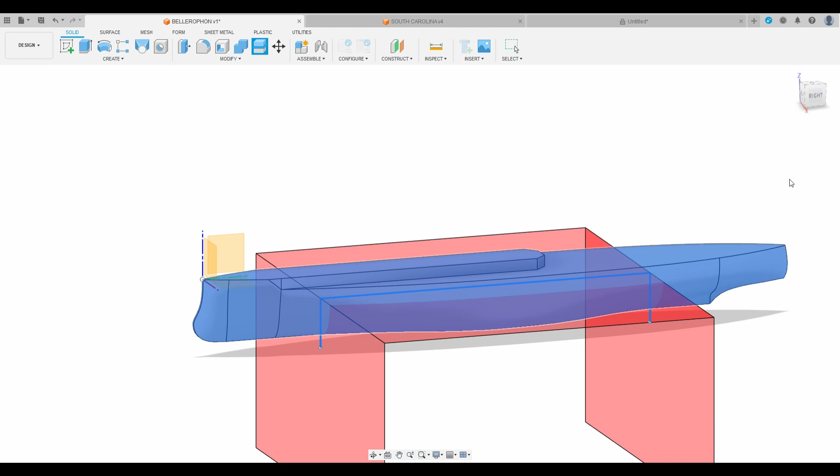What we're going to do is go to split body, select our body. For the splitting tool, we're going to select the sketch, and it's going to cut the body along that profile. Make sure you have your extend splitting tools selected, otherwise it might not cut the entire body. Alright, we'll hit OK. Our body is now split along that line.

I'm going to select move, select that body. It's going to be hard to get the move tool perfectly centered or straight up and down, left to right, all that. So just click on it, hit set pivot, turn your origin on, and just select the origin point. That'll give you a straight up and down selection point to move off of. Come back and hit done, and then we're going to move this out.

Let's give it a 1/16... actually, let's give it a 0.09, about 3/32 armor belt. That looks roughly scaled to something from this time period. Hit OK. So now we have our armor belt, but then we've got this weird bulge right here where it ends.

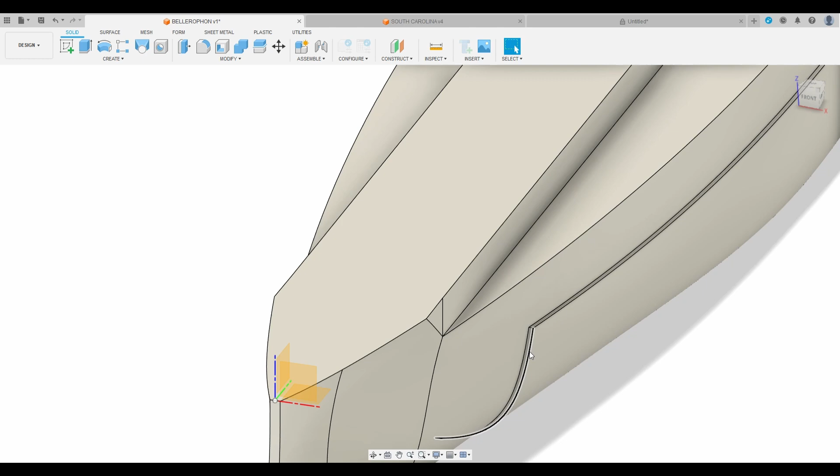It's going to be hard to sheet, hard to model correctly when we go to turn this into a warship model. So I want to fair this into the hull so it has a nice gentle progression into the hull. I could do a fillet, but it's going to be very abrupt and doesn't work very well, and the computer starts yelling at me if I go too far. I don't really like that. I want a longer transition into the hull. So what I'm going to do is turn this sketch back on.

I'm going to edit it, and drag this line out to where the actual armor belt ends, so roughly about there, roughly about here. I'm going to finish the sketch and split the body again. Oops, that's already selected my line. Split the body again at these points.

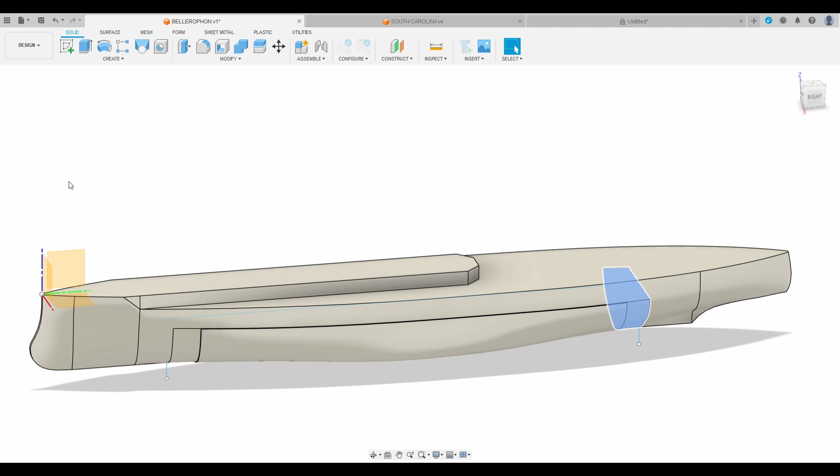Now we have two points here, two separate bodies. Let's go back up here, you can see these are now all separate bodies. This back body, I'm just going to go ahead and delete it, and the forward body, delete that as well.

In my solid tab, go to loft. Loft this armor body back to the hull. You can see how it goes from armor belt, gentle progression right into the hull. The curvature really doesn't change too much right in here, so it's not going to affect the overall shape of the boat or anything like that.

So I'll go ahead and do the same thing on the stern. Got a loft from the boat to the armor belt, get a nice smooth transition, and then we're going to combine this all back together. Oh, it already did, never mind. This is now one solid model.

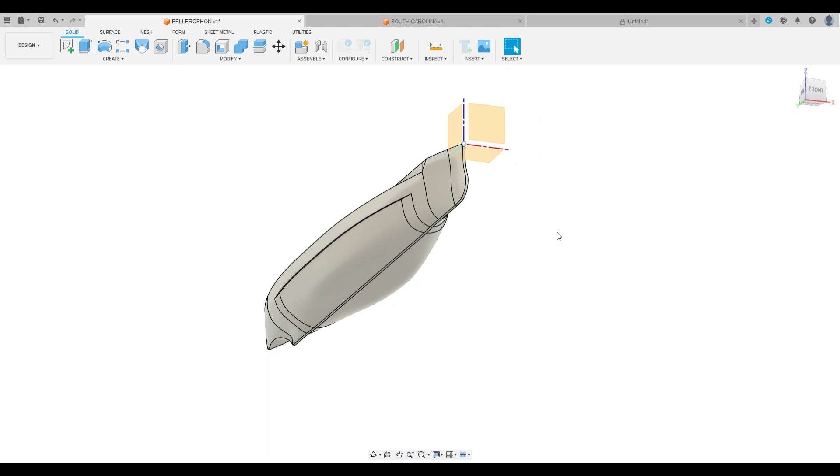But if you go to the other side, you can see we got an indent where our armor bulge was. So basically, how we get around that is we split our body again, split it on the center line, delete the bad side, and then we'll just create a mirror of the existing hull. And now we have two perfectly good armor belt sides.

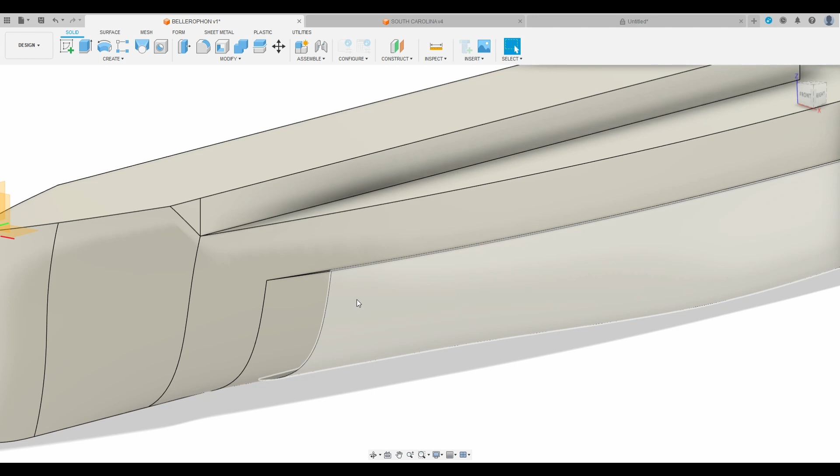So this boat doesn't get them, but basically that's the process you would follow if it did. You get a nice smooth transition into the bulge or belt, and you don't have any weird issues, like if you were to just do the top and bottom of the belt, you'd have a really hard area to sheet because you're going to have a hard line at the bottom that drops into the rib, and it just doesn't work very well. You can try to fillet it, but it's very abrupt, and this is a nice gentle progression. So that's how you do that.

Also, I'm going to go back to the original hull. Delete all of this. Alright, I'm going to show you how to check your displacement in Fusion. So what you want to do for that, if you want to check to see, say this model's supposed to float at, let me check for Dreadnought, what the actual displacement is in our hobby. Bellerophon. So for weight, standard weight's about 17 pounds. I'm going to create an offset plane from the deck to roughly where I think the water line should be, because I don't exactly know. Let's go like 1.25 inches or so. Let's do that.

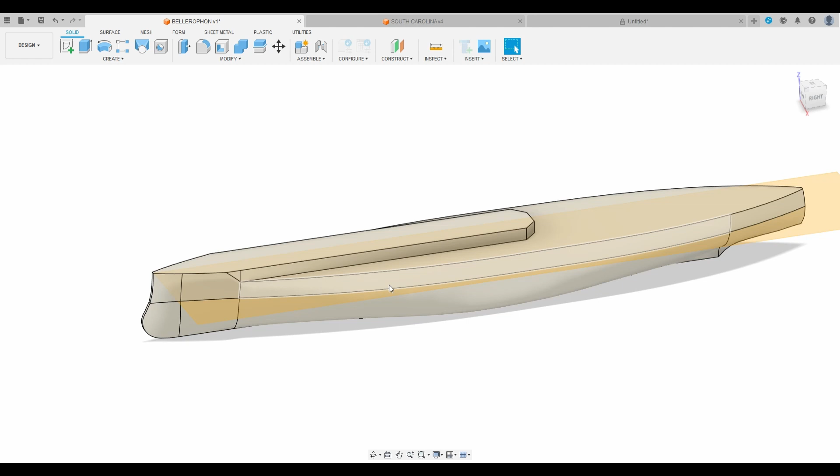So we're going to split our body on that plane. That will give us basically what's going to be underwater. Make that invisible. So this lower section, what we're going to do is go into Modify and get Physical Material. I'll open up our Physical Material tab. Hopefully you can see this. If not, go down to your liquid, and the only thing there is water. Grab that and then place it onto your lower hull section. And we're now telling Fusion that this is water.

Then what we want to do is go up here to our document settings. We're going to change our units to feet or foot. Hit OK. And now on body 15, which is our lower section here, that's water, right click and go down to properties. And over here it's going to tell you the mass. 15.82 pounds of mass. So that tells us our displacement here is 15 pounds. Now the actual model is supposed to be around 17, so I might have my water line set a little bit too low. But if you know where your water line is, oftentimes your weight will be almost perfect for what the boat should weigh, displacement wise. So that's how you check that.

And you can move that plane up, cut it again, and see what your weight's at different water lines. Gives you a good idea of how much weight you can put in your model and where you'll be floating at. So that's how you check that. Go back. Anything else I can show you?

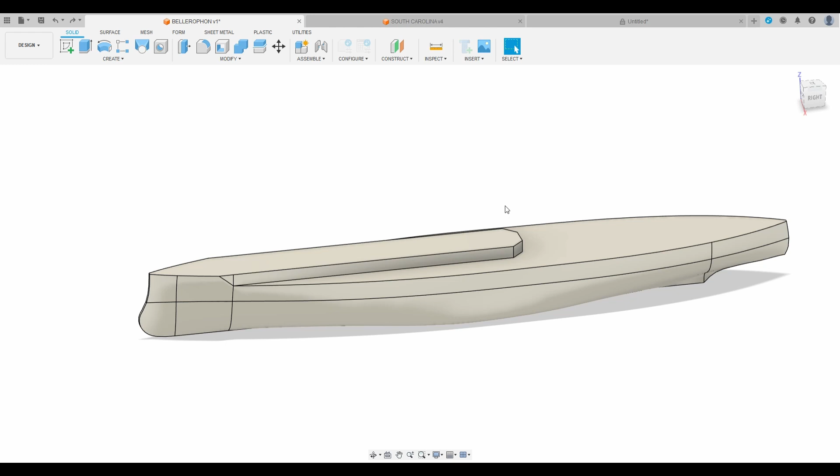It's more than enough to overwhelm me for now. A lot of times when I'm done, I'll come in here and go to appearance, and come down here to wood, and apply it to faces. I'll put wood decks on just because it looks nice. Go to paint, I usually do the smooth powder coats. And just, let's do this, make it look more like a boat. But that doesn't really affect any modeling aspects or anything, it just kind of makes it look more like what it should when it's all said and done.